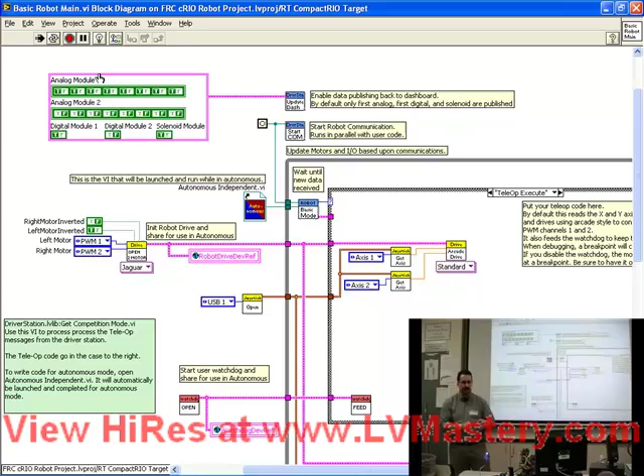Okay, so everyone sees that with this default code, you put this on your robot, you basically take the new control system, replace your last year's control system, hook everything up, run this code, you can drive it around the cafeteria, and run it into walls, do all kinds of crazy stuff. So that's with 0 modification.

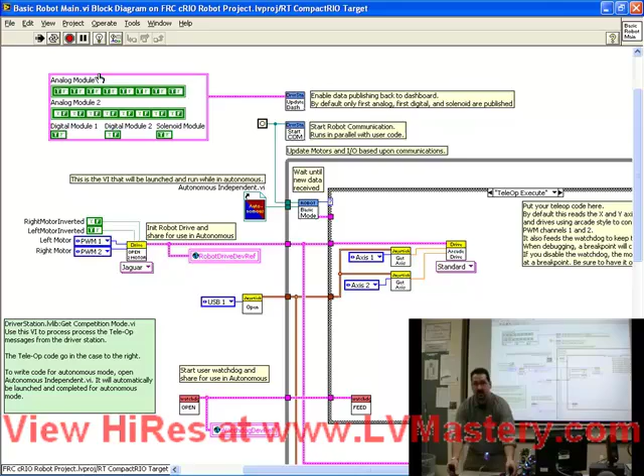So I want to talk now a little bit about this framework, understanding it, what we see here, and a little bit about how to change it. A couple people have already asked, how do I connect a servo, which I want to do quickly. And another good thing is, how do I change it to tank drive? Some people prefer to have 2 joysticks, where one actuates one side and one actuates the other. So I'm going to do that modification, or maybe I'll just start it and let you finish it as part of an exercise. Before I go on, are there any questions about what you see here?

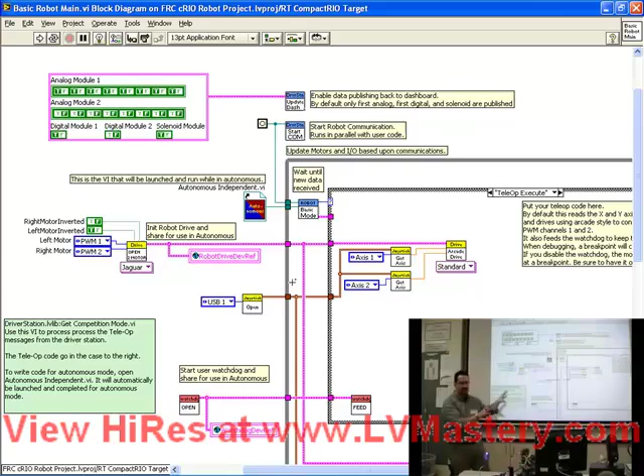Okay, great. So before I can make any modifications, I'm going to stop it. The default framework doesn't have a stop button like we did on our joystick examples. You just have to do a hard stop by clicking that abort button in the toolbar up at the top.

So why don't I do some programming while you tell me what to do? So what I want to do is I want to change this so that instead of an arcade drive, we're going to do a tank drive using 2 joysticks. Okay, so I'm going to sit. Someone tell me what to do first.

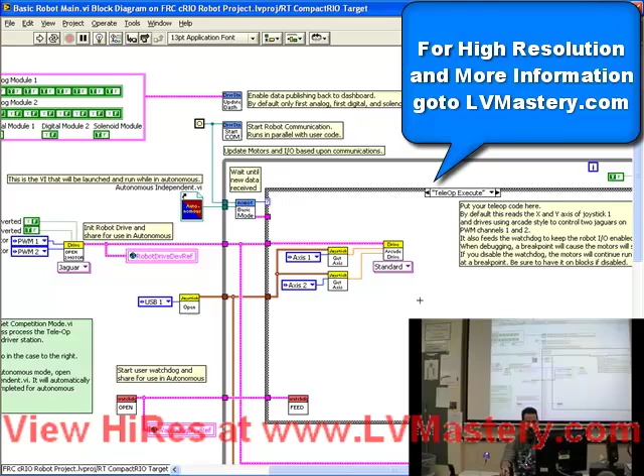Delete the arcade drive block. Delete the arcade drive block. All right, Control B. Control B. Ah, that was really good. Someone just said use Control B. Does anyone know what Control B is for?

Remove broken wires. I'm going to warn you that Control B is not really your friend. Control B is nice sometimes, but every now and then if you delete something, let me give you an example, and I'm going to have my undo key ready. If I delete this wire, and then I do Control B, a lot of stuff just went away. And actually stuff in these other cases went away.

So I would say use Control B very sparingly. And then be happy to use undo a lot. And I'm going to go back to this other case. So we're in the teleop execute, we've deleted our arcade drive. What do I need to do next?

Remember, I want 2 joysticks to do a tank drive. Get the tank drive, make all USB 2. Okay, make USB 2. So I'm going to take my joystick, joystick open, and make a duplicate of that. Anyone remember the shortcut for duplicating? Control drag. Okay, you guys are definitely on it. And I'm going to click on this to change it to be USB 2.

All right, so now I've got this. So what do I need to do next? Wire. Connect it to what? Get Axis. Okay, so I've got these 2 guys, and what they were doing before was giving me my x-axis and my y-axis out of one joystick.

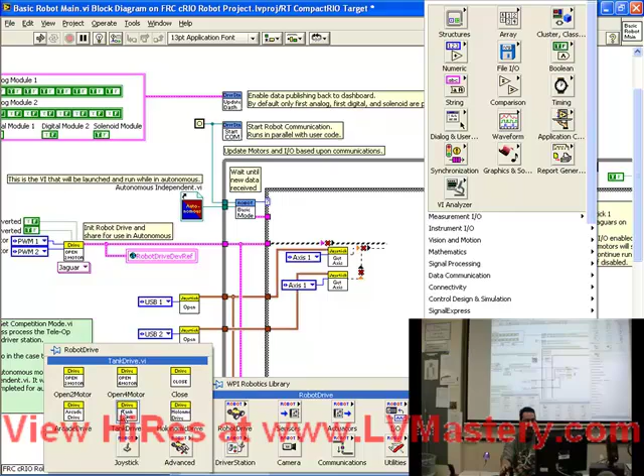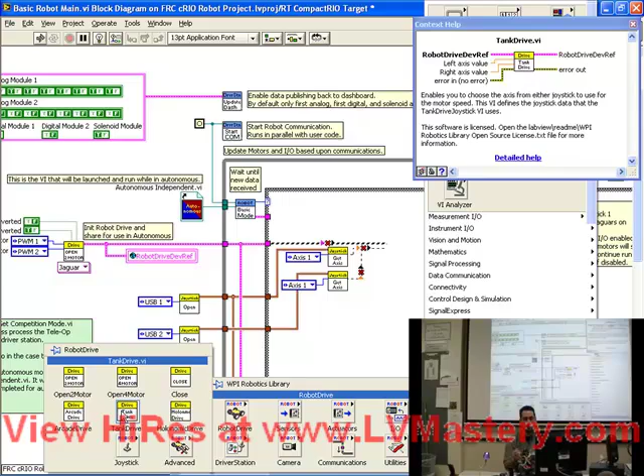Robot drive, robot drive - and lo and behold, there's something here called tank drive. Say I don't know what tank drive means. I just did the Control-H shortcut - do you remember what that's for? The context help. So that pops up and tells us, even while we're sitting in the palette, what the thing we're hovering over is going to do. So you see what tank drive is - it tells us a little bit. It allows us to choose the axis from either joystick and so on and so forth.

So we're going to pick that one. And also we've got 3 inputs to this - 4 really, there's an error in and an error out. But let's just ignore the error for now. So what do I have to connect first?

Whichever one you want, anything? Okay, well let's start with this top one. What do you think the top one means? Robot drive dev ref - that's kind of a weird word. What it means is device reference. Whenever we are talking to something, remember it's usually a 3-step process: open, read or write, and then close. So what open does is it creates that reference for us. So we're going to connect that to here.

Okay, next we're going to take that left value. Where are we going to get that from? Axis 1. And then we're going to take the right value and get it from here.

And you see I've got a bit of a broken wire - that's because my wiring skills are not 100%. If you sometimes miss when you're clicking, you get a little spare wire. So you can click on it to remove it and then just push delete. Or now, if you're really sure that you don't have any other broken wires, you can do Control B. So be very careful with Control B - sometimes it's really helpful, sometimes it's very destructive.

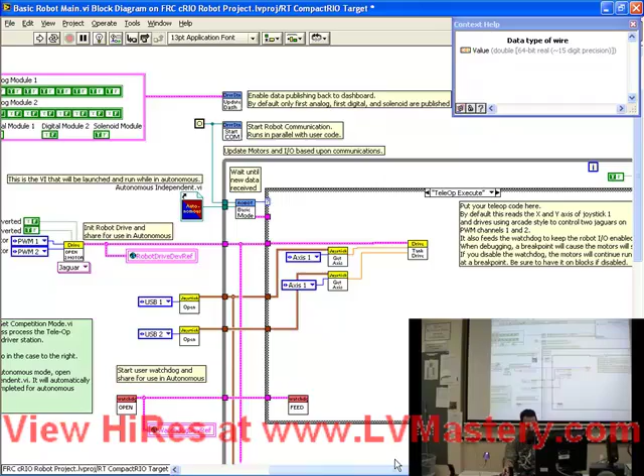Okay, so did I miss anything? Everybody's watching carefully - this should probably work. Should we try it? Oh, don't we have to close the joystick? Ah, thank you - glad somebody else was paying attention. So we need to do a second drive close - because we opened it - well, not drive close, but joystick close.

Because we opened this joystick, we duplicated what we had before, we need to duplicate the whole thing. So I'm going to just make a little bit more room by pulling down the bottom of this while loop, and then making a control drag to duplicate that, and just hook it up. So now when the while loop is done, it should close the joystick.

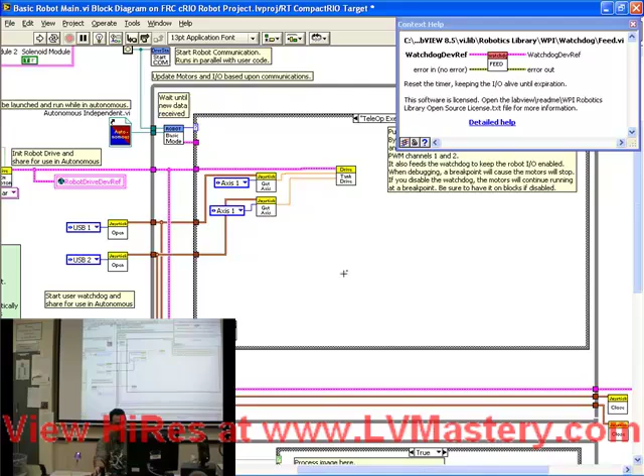So now let's run it and see what happens. Oh, it's going to prompt you to save, so we'll save it. Okay, so now I've got joystick 1. There we go - okay, so axis 1 is this direction.

Good to know, so it's kind of sideways tank drive. So this guy's moving the right motor, this guy's moving the left motor. And if I choose the opposite direction, it turns the other way.

Okay, so has everyone understood what we just did? We took the framework that was given, we modified it to use 2 joysticks, and we modified it from arcade drive to tank drive. Now, how long did that take us? Maybe 10 minutes. Okay, so this is very typical of the way I expect a lot of teams are going to do their programming for this. They're going to take the framework, make these kind of tweaks and changes, add another joystick, add another motor control, maybe take something from one of those examples, copy it, paste it into the framework, and then go.

Okay, yes sir? What if we're not running on tank drive - what kind of code can we delete? So the question is, what can we delete if we're not using tank drive? That's a really good question. I mean, if you're using arcade drive, you can leave it the way it was - the default code as it was. If you're not using it, you should delete it. So if you're not using arcade drive, you should get rid of it and put in what you are using. It's up to you - you've got complete control of what signals you send to which motor controllers.